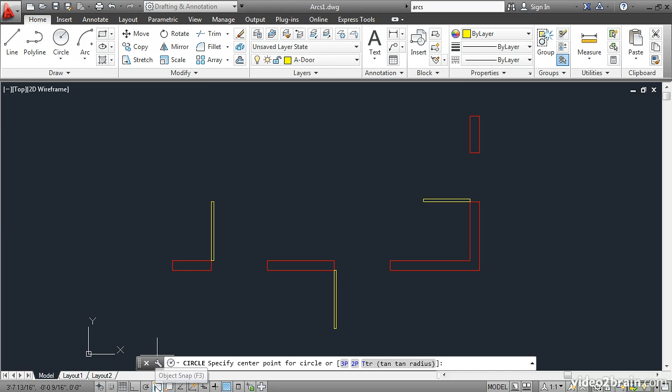This time, click on Object Snap on the status bar, and it will open the Object Snap tab of the Drafting Settings dialog box. This allows you to set up running object snap modes which stay on, so you don't have to use Shift right-click every time you want to call for an object snap. I'll select Endpoint and click OK.

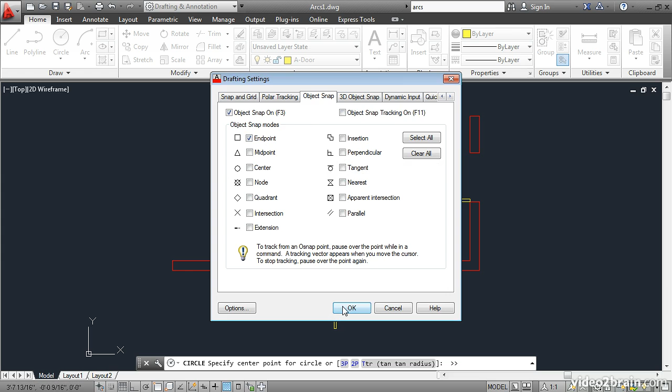Now, I'll position the cursor over the hinge point of the door and click to specify the center point for the circle. Then I'll come up here and position the cursor right on the end of the door. I'll click a second time to specify the radius of the circle.

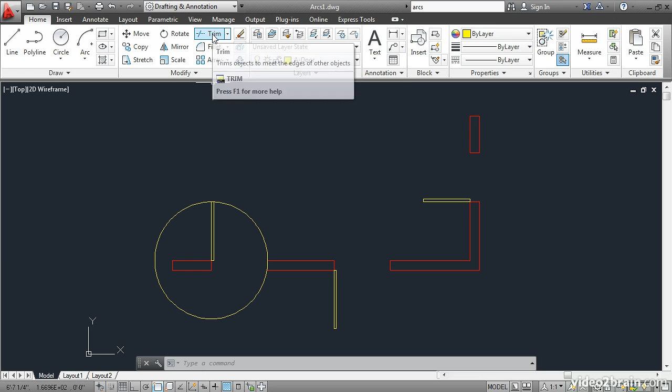Next, click the Trim command on the Modify panel. On the command line it says Select Objects or Select All. The first part of the Trim command requires that you choose which objects will be cutting edges. And in this case, I'll just press Enter to select the default option, Select All. So all the objects can act as cutting edges.

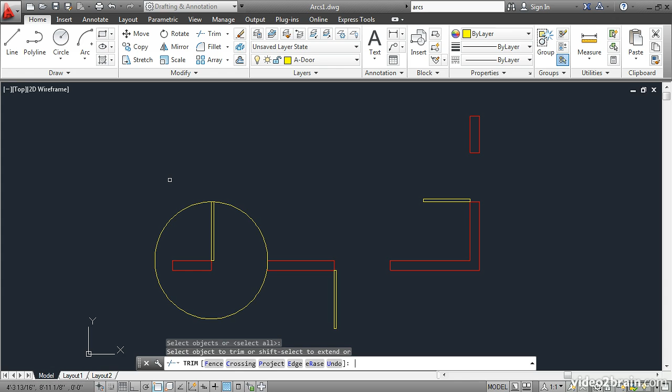Now I'll click this portion of the circle to trim it away. We're left with an arc. I'll press Enter to complete the command. Just to make sure that this truly is an arc, let's turn on Quick Properties, and then click on the arc without issuing a command.

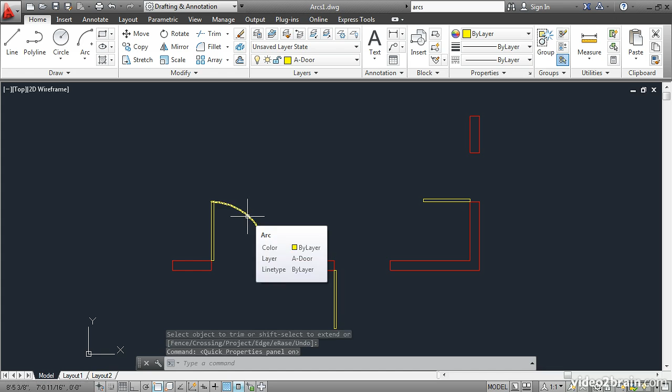It says right here it's an arc, and it gives the properties of that arc. It has a radius of 3 feet, which apparently is the opening in the wall and the size of the door. I'll press Escape to deselect the object and close Quick Properties.

This time, let's use a specialized arc command to draw the second door swing. I'll open the flyout, and you can see that there are many options here. Some of these options have the same items, like Start, Center, End. Down here it says Center, Start, End. So they're just in a different order. It's really a matter of personal preference which one you use.

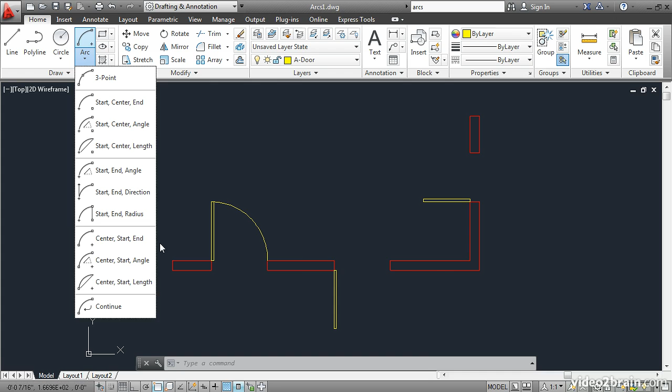In this case, I think I'd like to specify the center point first, and then the start of the arc and the end of the arc. So I'll click here, and then the command line says Specify Center Point of Arc. I'll come over here and click this hinge point, and then the start point would be, it could be here or it could be here.

But it has to be on the door because the default option for arcs is to create the arcs in a counterclockwise fashion. So if I click here, you'll see that as I move the cursor, the arc is swinging out counterclockwise from the start point. I'll click here to end the arc, and the command is completed.

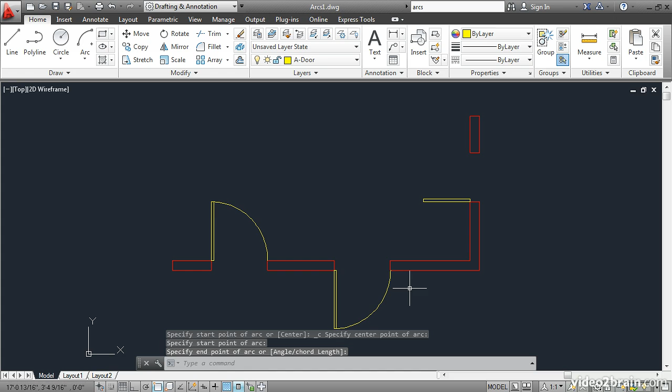Let's try that again. This time, I'll use this method, Start, Center, End. If I choose the start point here, we're going to have a problem that you'll see. I'll click here, and then it asks for the center point. I'll click here, and then the end point here.

You see the problem? The arc is created in a counterclockwise fashion from start to end points. Because I chose this as the start point, I ended up with this problem. So let's erase that. I'll click the Erase tool, select the object, and right-click to enter and complete the command. Let's try that again. Start, center, end. So the start would be here, the center is here, and the end is here.

That method worked pretty well for creating door swings, but there are occasions where you want to create curvilinear walls or curved items, and to do this you can string a series of arcs together. I'll type A, Enter, to execute the arc command. The default method is to click 3 points, the start point, the second point, and the end point.

If you press Enter and repeat the arc command, and then press Enter again, the arc will continue on from the last one, and the second arc will be tangent to the first, so that there's a nice curvature where the arcs meet. I'll press Enter to repeat arc, Enter again to continue, and in this way I can create a nice curvilinear form without any discontinuities or kinks between the arcs.

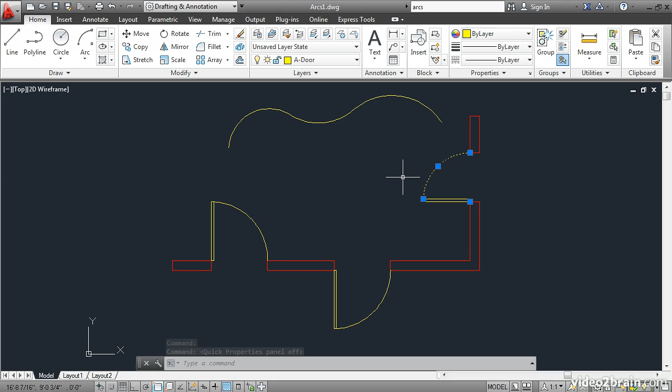You can edit arcs by clicking on them without issuing a command, and I'll turn off Quick Properties to get it out of the way. The grips are these blue squares, and they represent the key points of the arc, the start, midpoint, and end of the arc, and the center point.

I'll hover the cursor over this grip, and I see a little menu that appears. This is called a multifunctional grip. It says Stretch or Radius. I'll choose Stretch, and you can see what I can do here with this grip. I can stretch its midpoint, and the start and end points stay where they are.

But the center moves, because remember, arcs are always portions of circles, so if you change the curvature, it makes sense that the center point would move. You can alternatively change the radius of an arc, and that makes a concentric portion of a circle. You can also stretch or lengthen an arc by selecting one of its endpoints. And in this way, you can reshape arcs very easily. You now have some practical experience creating arcs and are aware of their creation options.